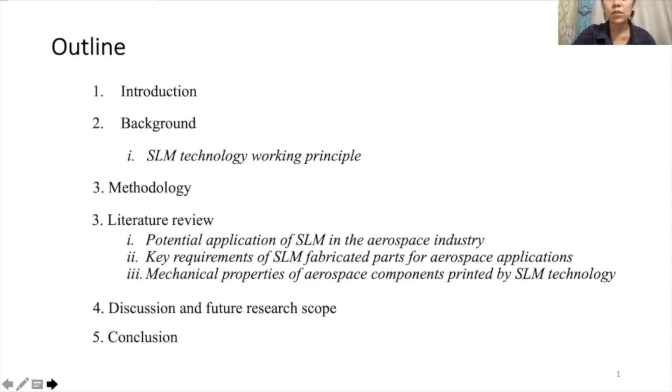So let me introduce my topic: selective laser melting technology in the aerospace industry. Aerospace component manufacturing technologies are all targeted at rapidly improving the efficiency and quality of parts from design to manufacture, while reducing manufacturing costs. Selective laser melting is an additive manufacturing method that uses a layer-by-layer process for producing complex metallic components in medium quantities. It's a freeform fabrication process that can produce components with diverse metallic materials such as titanium, stainless steel, aluminium, nickel-based alloys, and other powders.

By adapting selective laser melting, manufacturing of existing designs is produced according to demand, and new improved components can be manufactured rapidly. In traditional manufacturing processes such as milling and machining, components are produced by removing up to 95% of expensive raw material. In contrast, additive manufacturing minimizes material wastage by building up a component from the optimal amount of powder and reusing the unused powder. Components can also be designed to be manufactured together as a single part, therefore avoiding assembly and the use of joining technology.

Consequently, selective laser melting manufacturing has potential to be faster and cheaper than conventional manufacturing processes while producing lighter components. So in this literature review, the potential application of selective laser melting in aerospace engineering is assessed considering materials analysis and quality of selective laser printing parts in terms of changes in the microstructure after printing.

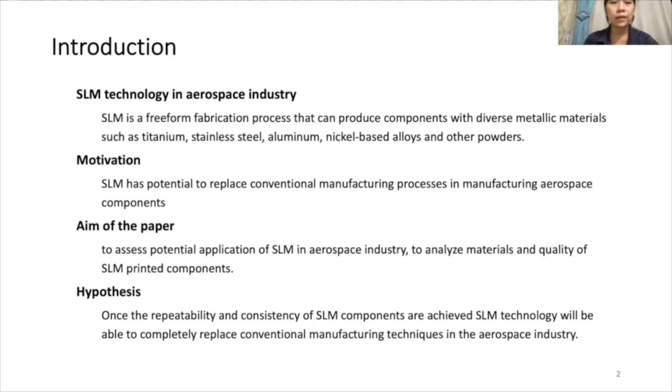So the SLM process consists of a series of steps from CAD data preparation to removal of fabricated component from the building platform. Before the CAD data are uploaded to the SLM machine for production of components, the STL files have to be processed by software to generate slice data for laser scanning of individual layers.

The building process starts with the laying of a thin layer of metal powder by a roller on a substrate plate in a building platform. After the powder is laid, a high energy density laser is used to melt and fuse selected areas according to the process data. Unsintered surrounding powder is used as a support structure to keep the geometry of the sintered part.

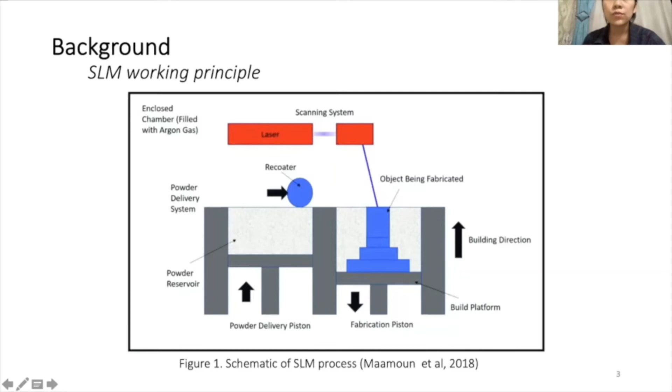Once the laser scanning is completed, the building platform is lowered by a fabrication piston. The next layer of powder is deposited on top and the laser scans a new layer. The process is then repeated for successive layers of powder until the required components are completely melted.

Next slide considers methodology of this paper. So first is search criteria. All data were extracted from specific science databases such as Google Scholar, Scopus, ResearchGate, Elsevier, and Science Direct. All of these sources have readable articles where it's possible to subscribe to updates of colleagues in additive manufacturing, so the latest references will be accessible to study.

Furthermore, technical reports as well as PhD dissertations done in this field could also bring information of practical value, and they were also used during writing this paper. So for inclusion and exclusion criteria, additive manufacturing application in the aerospace industry is a broad topic. This paper will focus on SLM-based aerospace components and exclude any study where other methods of additive manufacturing are used.

As technology is progressing day by day, the relevance of articles is assessed by the date of publication. So this review will focus on articles published in recent years, and those published more than 10 years ago were excluded from the literature content. So here starts my literature review.

First topic is potential application of selective laser melting in the aerospace industry. Selective laser melting has broadened its range of application in various fields due to the huge number of advantages over conventional manufacturing technologies. One of the major benefits of selective laser melting is that it can create complex shapes with reduced time and cost. This revolutionary technology has many abilities that make it superior over other manufacturing techniques, and these advantages are listed on this slide.

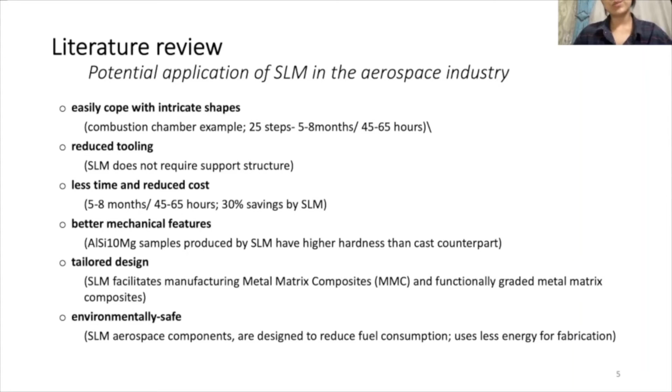Next slide is key requirements of selective laser melting fabricated parts for aerospace applications. First is the level of densification. The densification level is a characteristic that directly affects mechanical properties of printed parts. Regarding the layering nature of additive manufacturing technologies, it gives both advantages and disadvantages.

There are many risks that can be caused by SLM nature, such as lack of melting, incomplete laser penetration, spattering, keyhole effects, powder evaporation, thermal stresses, and gas entrapment. These limitations are the main causes of defect formation. All of these issues could result in porosities and cracks, and can adversely influence the densification level.

Localized heating and cooling in post-processing techniques can cause defects different from those observed in traditional fabricated parts. These defects are unacceptable even in negligible amounts because defects in aerospace components can lead to catastrophic consequences due to crack nucleation sites initiated on the defects during pressure.

According to previous researchers, the relative density of a selective laser melting part made of aluminum is 94%, which is acceptable for aerospace applications. However, densification is sensitive to any exterior changes and could not be uniformly distributed along the whole printed part. That's the main limitation emerging in selective laser melting application in the aerospace industry.

However, there are sufficient studies optimizing process parameters and utilizing different post-processing techniques that help solve the density problems of selective laser parts by eliminating defect formation.

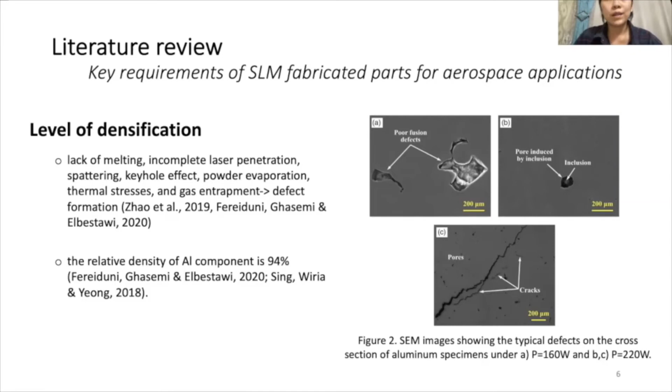So the next slide will concern surface quality. Surface roughness is known as one of the limitations of selective laser melting technology caused by its layered nature. Especially in components with complex geometry, surface quality is low due to the difficulty to machine.

Partially melted powder particles or even unmelted particles, balling phenomenon, and stair-step effect are the most frequent factors defining the surface quality of the printed component. In general, additive manufacturing parts should experience post-process surface finishing, such as machining, grinding, or chemical polishing, to be applicable in the aerospace industry. Recently, experimental studies were done on the influence of process parameters and heat treatments on the surface quality of selective laser melting fabricated samples.

The important conclusions are as follows. First, variations in surface roughness were observed, which is due to the inherent random errors of the manufacturing system. Second, the surface roughness decreases with increasing laser power level, and the best results were obtained at 0.32 kilowatt laser power.

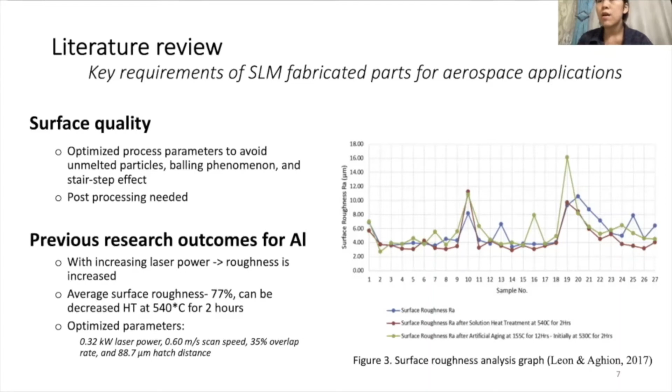0.32 kilowatt laser power, 0.6 meter per second scan speed, 35% overlap rate, and 88.7 micrometers hatch distance were determined as optimized parameters for best surface quality in as-built condition. The surface roughness can be further decreased by solution heat treatment at 540 degrees for 2 hours.

So next slide is about strength to weight ratio. The principle of having a high strength to weight ratio is to use less material or materials with low density, but still provide the same or improved mechanical characteristics. Conventional ways to obtain lightweight construction for aerospace components is to apply lightweight materials with high strength properties, or optimize the structure of lightweight materials with appropriate manufacturing methods. Also, materials, especially aluminum alloys, continue to be the dominant materials in the aerospace industry.

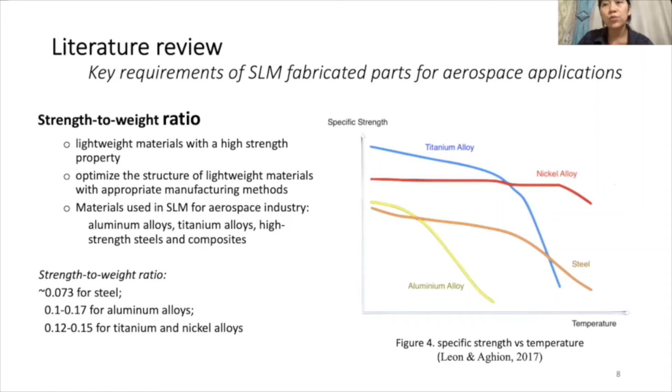Composite materials are gaining increasing interest and competing with aluminum alloys in many novel applications in aerospace industry. Materials with high strength mechanical properties with relatively low weight is known as the best strategy to improve fuel efficiency and get closer to green production of aerospace components with low CO2 emission. The general commercial materials used in aerospace industry are aluminum alloys, titanium alloys, high-strength steels, and composites, which typically account for more than 90% of the weight of an airframe.

So this slide will concern wear resistance. During the whole life cycle, most of the aerospace components such as shafts, valves, pistons, rods, and bearings are generally exposed to wear. Therefore, the material of these components should be selected taking into account wear resistance. Selective laser melting printed parts from metal matrix composites demonstrate better wear resistance in comparison with monolithic counterparts. The wear characteristics of selective laser melting composites depend on the size, concentration, and type of reinforcing particles.

According to previous studies, selective laser melting processed titanium and aluminum composites demonstrated lower wear rate and coefficient of friction than the monolithic aluminum and titanium parts. Furthermore, studies done by several researchers state that there is a remarkable dependence between wear resistance and the size of reinforcing particles. So it means that higher wear rate and coefficient of friction were observed in metal matrix composites with relatively coarse reinforcing particles due to the low densification level and the structural inhomogeneity.

Also, partially melted or unmelted regions of metal powder directly influence the interfacial bonding and negatively affect wear resistance. All in all, high densification level, enhanced microstructural consistency, and improved hardness with relatively fine reinforcing particles are a key strategy to obtain better wear resistance for metal matrix composites.

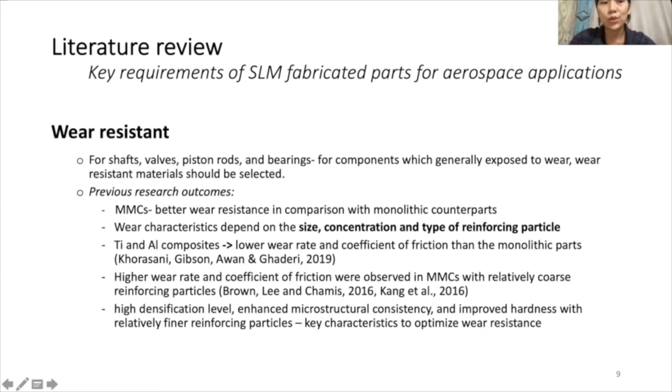This slide will concern mechanical properties of aerospace components printed by selective laser melting technology. Metal matrix composites is a material combined with at least two constituent parts, one of which is a metal and the other is a different metal or material such as ceramic or any other chemical compound. In comparison with traditional subtractive technologies, SLM technology produces components with enhanced strength and acceptable ductility from MMCs.

There are many previous studies comparing the strength and plasticity of aluminum and titanium matrices with components produced by conventional methods. According to results, the strength of selective laser melting printed titanium and aluminum parts was significantly higher than their monolithic counterparts. Furthermore, the results have shown that the inclusion of reinforcing particles into a metal matrix increases the strength of the parts while decreasing its plasticity. However, recent studies have shown an increase in the strength and ductility of selective laser melting metal matrix composites.

It's well known that the main goal of composites production is to enhance mechanical properties, and one of the main properties of aerospace components is the hardness of material. In this regard, selective laser melting technology can increase hardness by up to 200% by improving grain refinement and increasing residual stress. Metal matrix composites deposited by selective laser melting technology present extraordinary features such as high strength at elevated temperature, improved hardness, better fatigue, and creep characteristics in comparison with traditional fabricated counterparts.

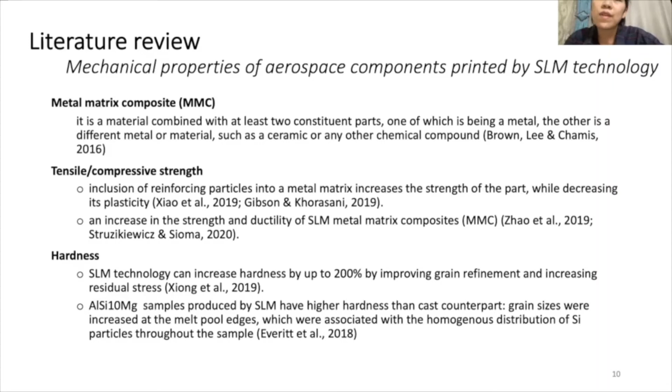It makes them potential candidates for advanced technological applications in aerospace industry. So next slide is discussion and future research direction. The mechanical properties of SLM may be superior to those of the original counterparts, but reproducibility and test standardization are still an issue.

Reproducibility problems can be due to microstructural defects caused by raw materials or processes and can be identified in several ways. Also, strength analysis is still an issue due to many phenomena like residual stresses, anisotropy, and porousness. Furthermore, there are very strict testing protocols and certification and standardization procedures before proposing any aerospace parts for application. The certification generally demonstrates the reproducibility of the manufacturing process and the consistency of the quality of printed parts.

By the way, process repeatability and quality consistency are known as key challenges in selective laser melting used in aerospace applications, especially when produced in high volume batches. Furthermore, the shortage of techniques for verifying components fabricated by powder bed fusion technology, and standards relating to terminology or processing procedures for different metal alloys, considerably impede the application of powder bed fusion techniques in the aerospace industry.

Future research would be extended on the effect of selective laser melting printing parameters variation on the mechanical performance of printed parts. There are more than 100 selective laser melting process parameters, but the key parameters are those which significantly influence the density of produced parts: layer thickness, hatch spacing, and laser power.

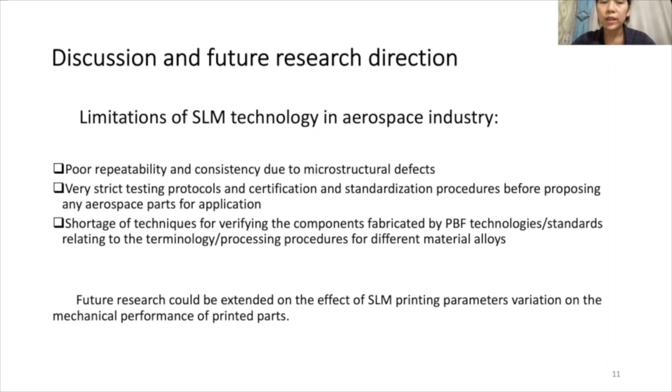As laser is an important component of the selective laser melting process, the choice of laser source is vital due to different energy absorption parameters. The variation of laser parameters is very important in standardization and enhancing repeatability and consistency. So let me conclude my presentation.

According to the studies done, it was found that selective laser melting is a promising design and manufacturing method that can effectively reduce the design constraints imposed by conventional manufacturing methods. Selective laser melting manufacturing also has potential to be faster and cheaper than conventional manufacturing processes while producing lighter components. The fabricated composites were defined in terms of mechanical and structural properties, meeting the requirements of aerospace components.

Mechanical properties of selective laser melting printed parts were analyzed according to previous research studies. Results showed that selective laser melting treated components demonstrated higher tensile strength and ductility compared with their monolithic counterparts, and the best results for hardness were obtained by reinforcing the component with ceramic. High wear resistance was obtained from high densification level and finer reinforcement particles.

Furthermore, recent challenges of selective laser melting technology in the aerospace industry were analyzed. In conclusion, in the current state of selective laser melting, with the absence of certification and process standardization, it's not feasible for wide application. When all process parameters are controlled and consistent, and the printing process is stable, only then can selective laser melting be considered a viable method in the aerospace industry.

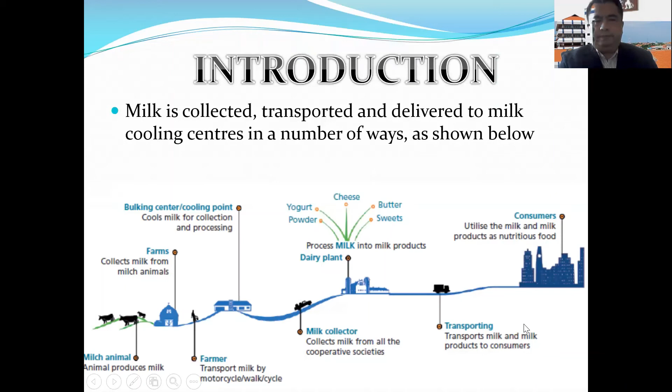Warm fresh milk should be cooled immediately after milking to preserve quality and prevent spoilage. Cooling to 4 degrees centigrade within 3 to 4 hours is essential, but more rapid cooling is much preferred.

Normally, milk arrives at the milk cooling centers in the morning or late afternoon or early evening. Therefore, batch milk cooling is performed as such in cooperatives, for example, Koperasi Unit Desa SAE in Pujon, KUD in Batu, and elsewhere.

The main problem that often occurs in dairy factories is the operator's lack of understanding of the process that occurs. This creates difficulties in controlling the process or in designing appropriate equipment when needed.

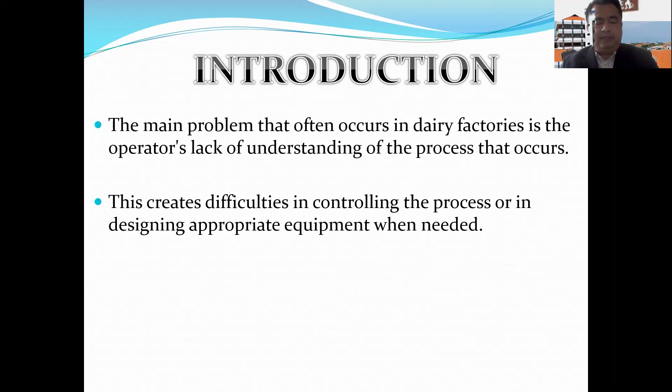The background of this research is to understand the operation process, which is the overall main goal for developing the process model. The model is often used for operator training, process design, safety system analysis or design, or control system design.

So the aim of this presentation is to present the dynamic model of batch milk cooling process.

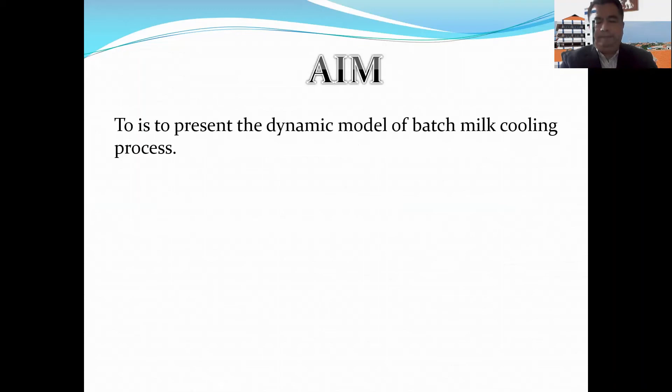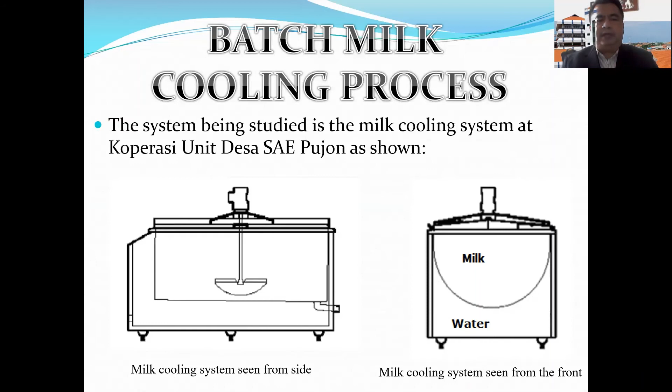I will make this presentation quick. The mathematical model for the process can be derived based on energy balance. This is the result: the transfer function TO in S domain per T1 in S domain is equal to 1 per M Cp per U A S plus 1.

V is the tank volume in liters. T1 is temperature of chilled water. Ti is temperature of inlet milk. To is temperature of milk inside the tank. M is mass of milk in the tank, calculated from V and rho. Cp is heat capacity of milk. A is surface area of milk cooling tank. U is overall heat transfer coefficient. Rho is density of milk. Q is heat release from milk to cooling water.

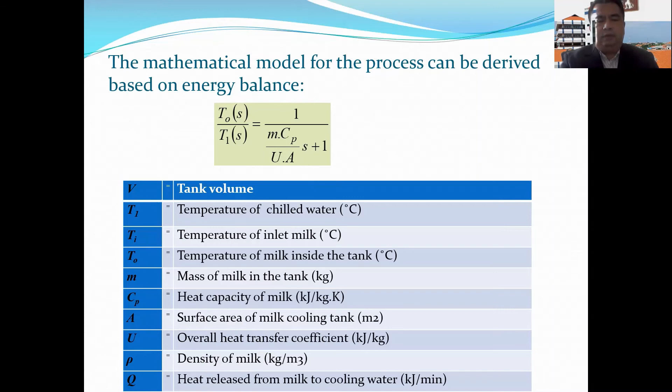Table 1 shows steady state and parameter data for this research. Volume of the milk in the tank is 2,500 liters with inlet temperature 36 centigrade. We want the temperature at 4 degrees centigrade in 2 hours. T1, the temperature of chilled water, is 2 centigrade, maintained constant using a refrigerant system. Cp is 3.93, from the data. Rho is 1027 kilogram per meter cubed.

M, this value can be calculated from V and rho, and the value is 2,567.5 kilogram. U is 274.4613 kilojoule per minute meter square centigrade. A equals 0.868 meter square, and Q is 2,690.74 kilojoule per minute.

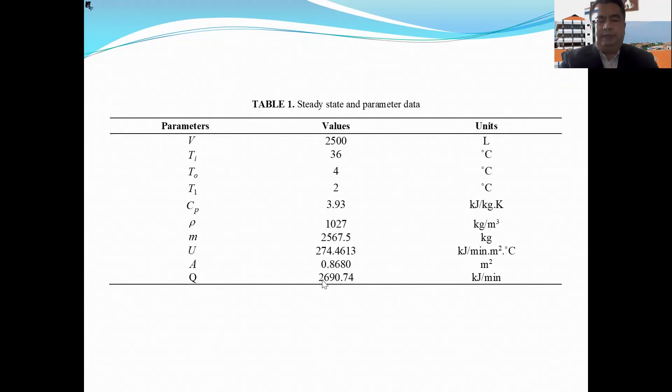So we can derive this transfer function from heat balance, and the result is TO per T1 in S domain equal to 1 per 42.3548 S plus 1. 1 is the gain of the process, and the time constant of the process is 42.3548 minutes.

This figure shows how the milk temperature varies with time. From 36 degrees, it reached 4 degrees centigrade in 2 hours.

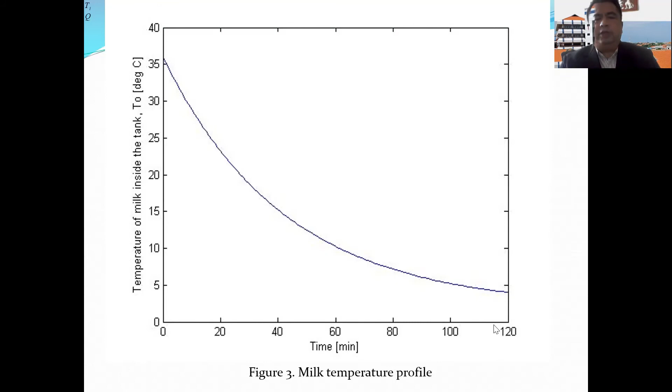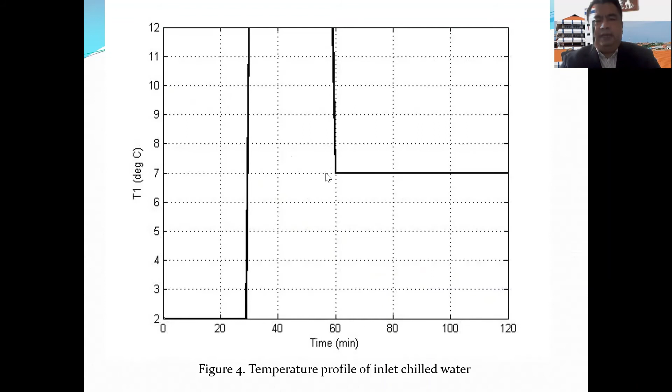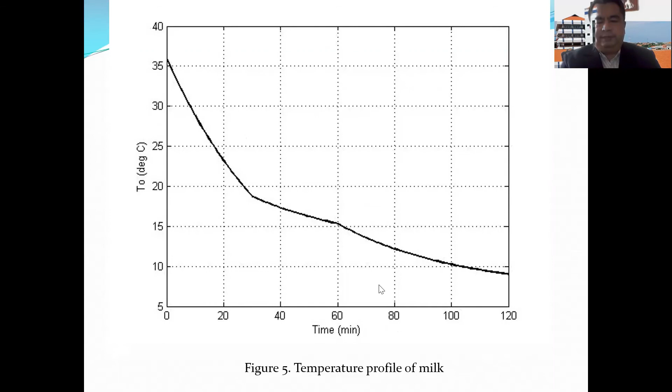So the conclusion of this research: first, the result of the dynamic model is a first order transfer function, G(s) equals T0 divided by T1, equal to 1 per 42.3548s plus 1. The dynamic model of batch milk cooling process has been simulated using Simulink.

Overall heat transfer coefficient U was assumed to be constant and could be calculated as the batch process finished in 2 hours. The milk temperature profile shows reasonable dynamics during the process. The proposed model can be useful for control purposes.